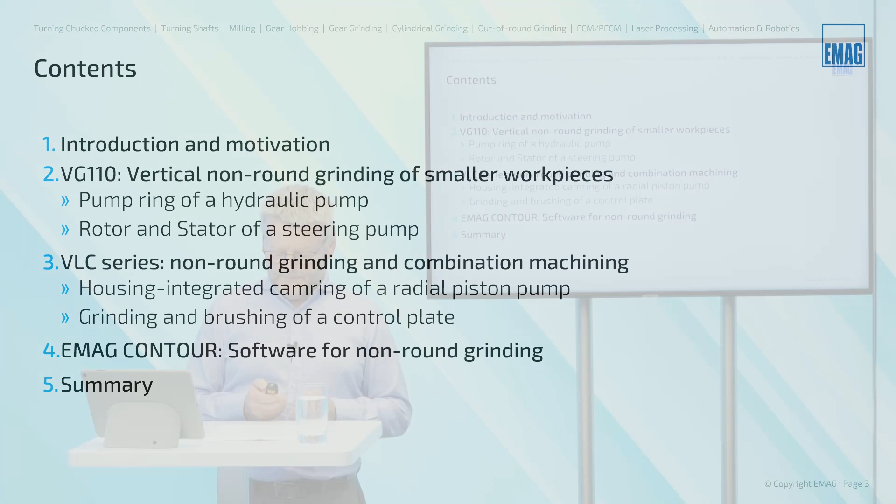Now, what was the motivation for this webinar? According to a study by Growth Market Reports, the global pump market is a growth market with an annual growth potential of around 4% until 2031.

Pump systems are not visible at first glance, but very important components in a variety of applications in our daily life. You can find pump systems in cars, in commercial vehicles, in vehicles for agriculture, in construction, and also in household applications or in heating systems.

The increasing demand for energy efficient pumps is likely to boost demand for pumps on the market. So the pump market is an interesting market area which differs from other market areas that currently have stagnation or decline in terms of growth.

That's the motivation for this webinar, and now I will hand over to Yannick for the first point, VG110. Please, Yannick. Thank you very much, Manfred.

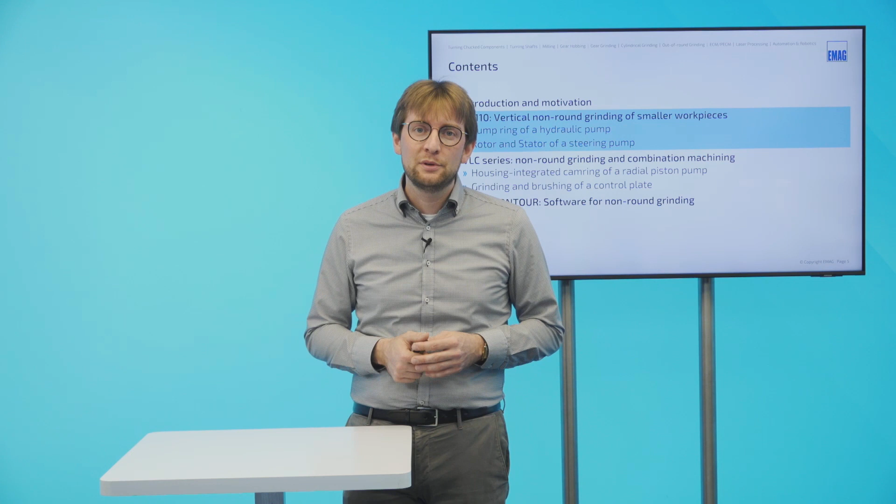Good morning, ladies and gentlemen. My name is Yannick Röttger. I'm responsible for the Department of Technology at Business Unit Grinding in Salach, and I'd like to introduce you in the next chapter to our machine solution VG110, a vertical grinding machine optimized for the production of small parts with non-round geometry. I'll present two use cases, two applications that have been carried out together with our customers.

The manufacturing of a pump ring of a hydraulic pump, and next a rotor and stator of a steering pump based on a gerotor pump system.

The VG110 workpiece portfolio includes workpieces up to a machining diameter of 110 millimeters. We can grind stators, rotors for gerotor pumps. We can grind pump rings for vane pumps, which we will focus on in the next minutes. We can also grind cam parts for camshafts, so a wide range of applications.

As you can see, especially in correlation to the size of the manual panel, it is a very compact machine with a small footprint, machine width with only 1.4 meters, so it requires very low space in your production shop floor.

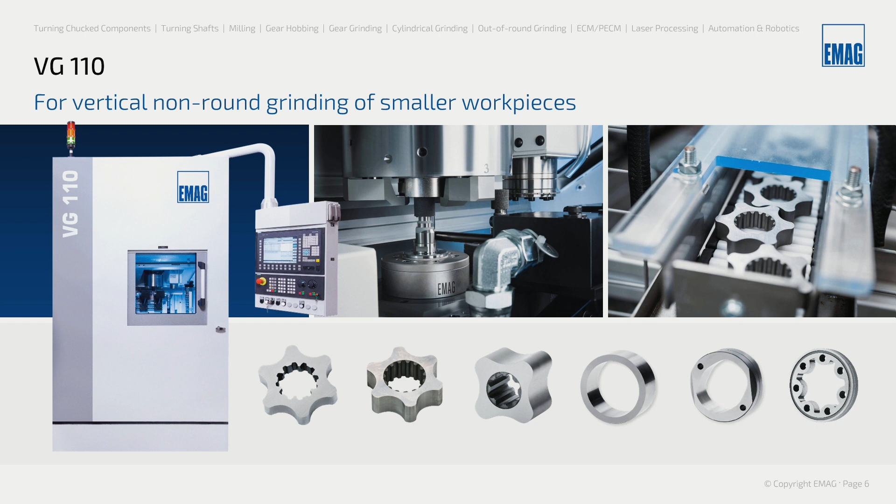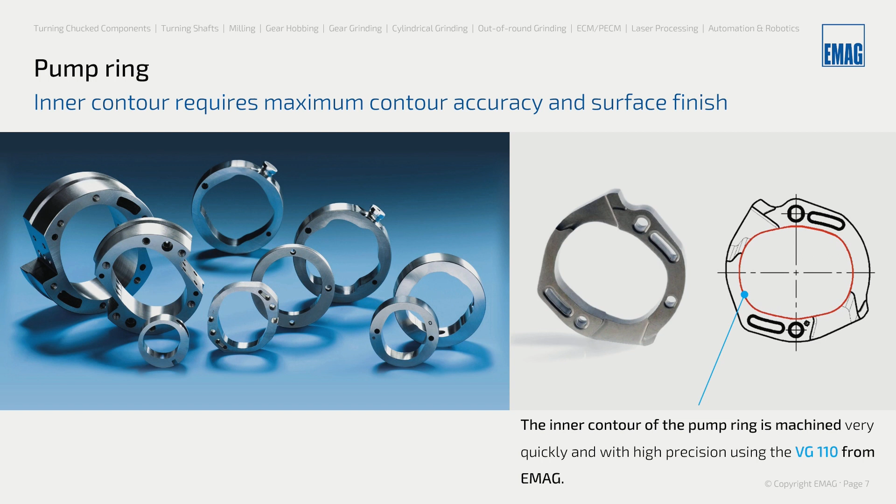The core component of a vane pump is the pump ring, which is shown here. We grind the internal diameter, marked red in this sketch. And the quality of the contour and also the surface finish has a significant influence on the energy efficiency.

And the noise emission of the pump in the further application in a vehicle or other machine types. So an optimized grinding process does not only save resources in your production, but also has a positive influence on the energy consumed in the further application. So we can optimize the holistic life cycle of this tool, of this part, and that's what makes the process design so interesting and challenging.

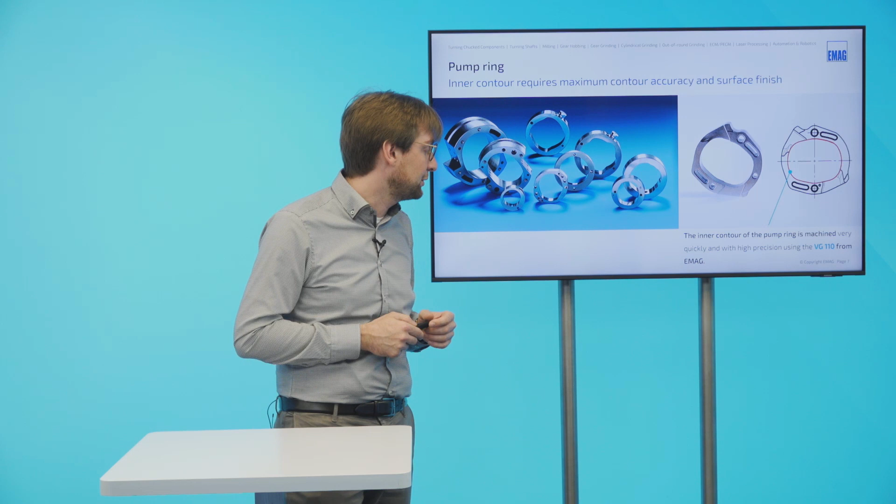What is the main functional principle of a vane pump? We have to understand this to make sure that we really achieve the required quality of the parts with regard to the further application. The red marked part in this sketch is the pump ring, which is ground with a non-round geometry in our grinding process.

The rotary rotor is the yellow part inside, and the vanes are fixed in these notches here, and with springs there is a force so that you have material contact between the vane and the pump ring. So you have fluid chambers with varying volume according to the ring geometry.

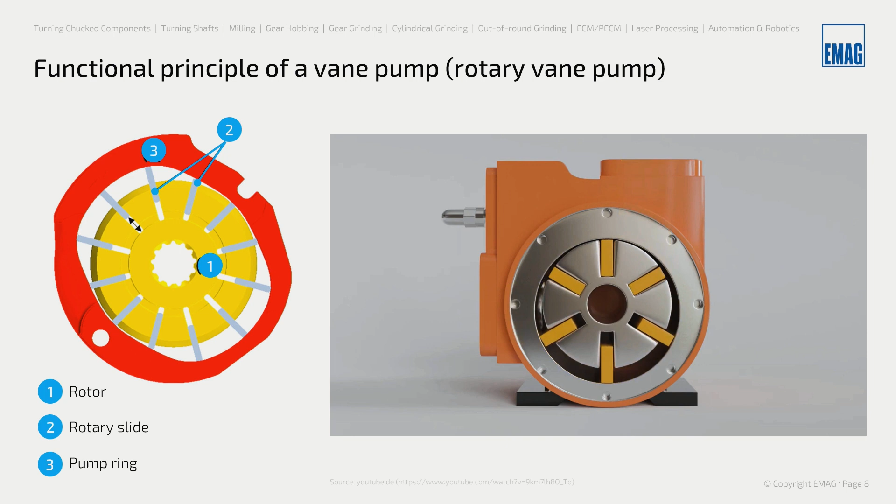In this video you can see on the inlet side we start with a small chamber volume that gets bigger, so there's an inlet of fluid, and the fluid chambers then get smaller, so we generate pressure, and that's what makes the pump work. Here you can see it in steel.

The pump ring is the part with the flat ground surfaces that we can see here, and the two holes for the inlet of the fluid in these sections. The rotor inside with the vanes is also visible here.

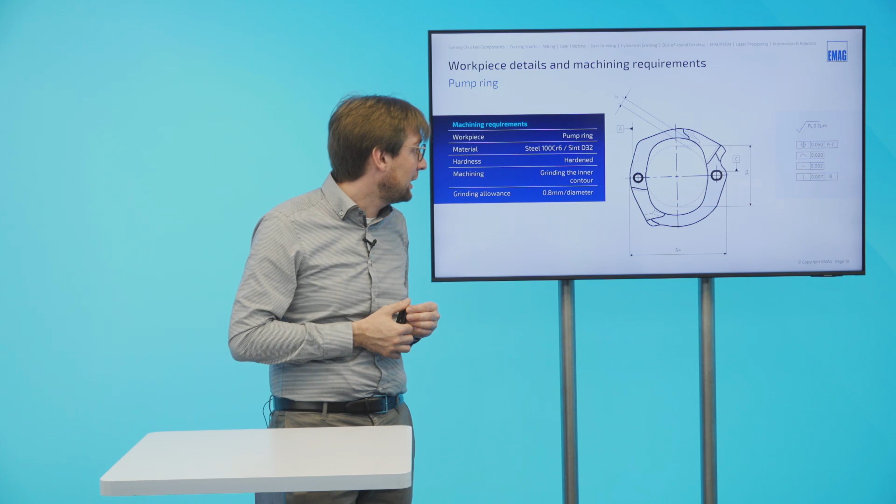What is our machining task for the internal grinding process of the pump ring? We have to machine hardened steel 100 chrome 6 or sintered metal D32. In both cases hardened, we have to grind the inner contour with a grinding allowance of 0.8 millimeter.

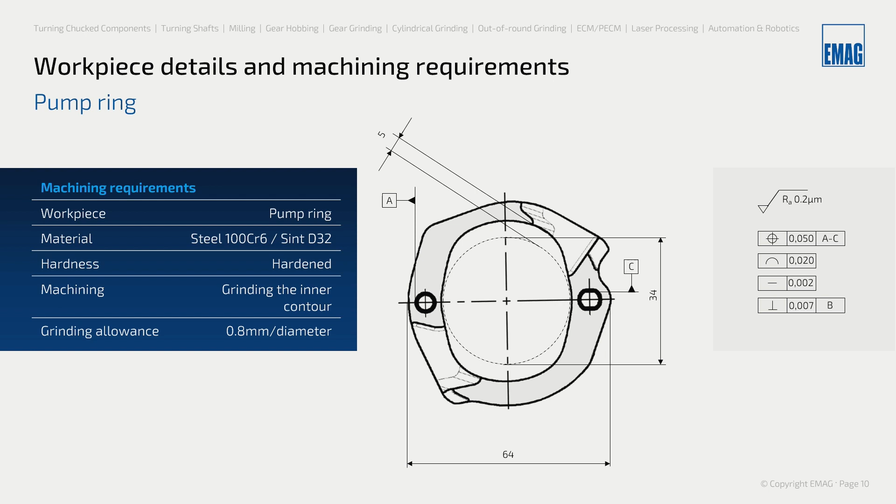So the main challenge in this task is to make sure that after such a high grinding allowance we get surface roughness lower than 0.2 microns. Of course, we have to pay attention to the shape of our part. The profile deviation has to be lower than 20 microns, the straightness deviation lower than 2 microns, and the perpendicularity lower than 7 microns. But focus here: achieving a surface roughness lower than 0.2.

This is our machine concept. You can see the design and the orientation of the axis. This concept is based on decades of experience at EMAG with vertical grinding machines and machines for combination technologies.

We have the machine base made of Mineralit. The customer or his automation places the raw part at our workpiece shuttle and also takes the finished part from the finished position next to the raw part position, both in horizontal directions.

The workpiece shuttle brings the part into the machine. It is lifted up by the workpiece lift, which is also responsible for the angular orientation of the parts, and brings it to the clamping device at the workpiece spindle. The workpiece spindle moves in X direction and brings the part into the machining area.

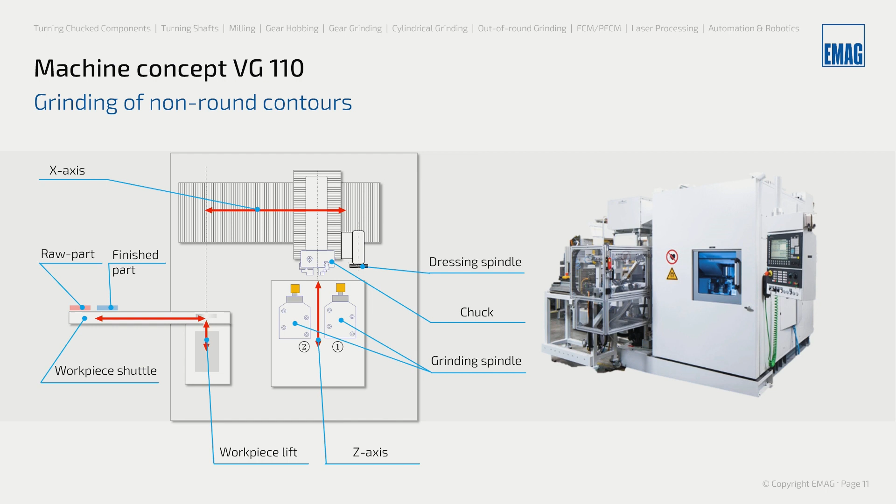As you can see, we have two internal grinding spindles available here. They move in Z-axis direction, so they make sure that there is contact between grinding tool and workpiece. In case that we use vitrified CBN grinding wheels, which are dressed in the machine, we use a dressing spindle that is mounted on the workpiece spindle.

On the right-hand side of the slide, you can see a system including also a workpiece handling system outside the machine, provided by EMAG.

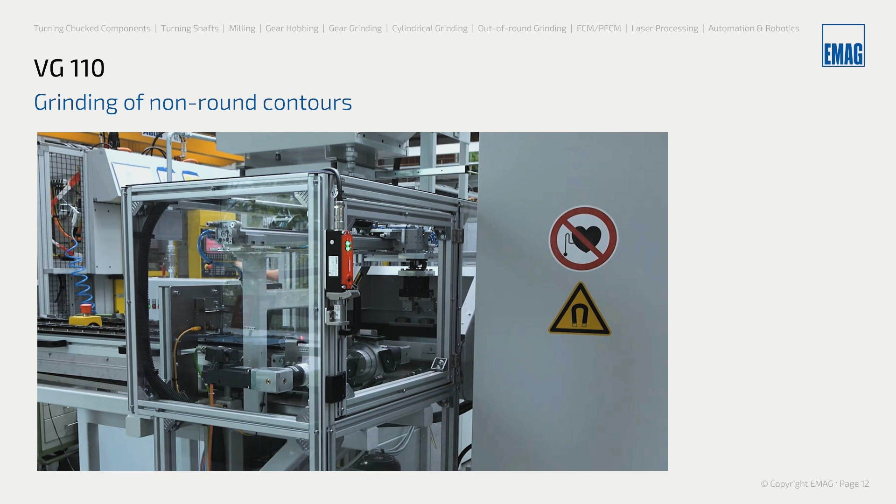How does it look in moving pictures? The workpiece handling here by our automation system brings the raw part to the shuttle, and here it takes the finished part from the shuttle. Here you see the placement on the shuttle, and here the finished part comes back for the further operation steps.

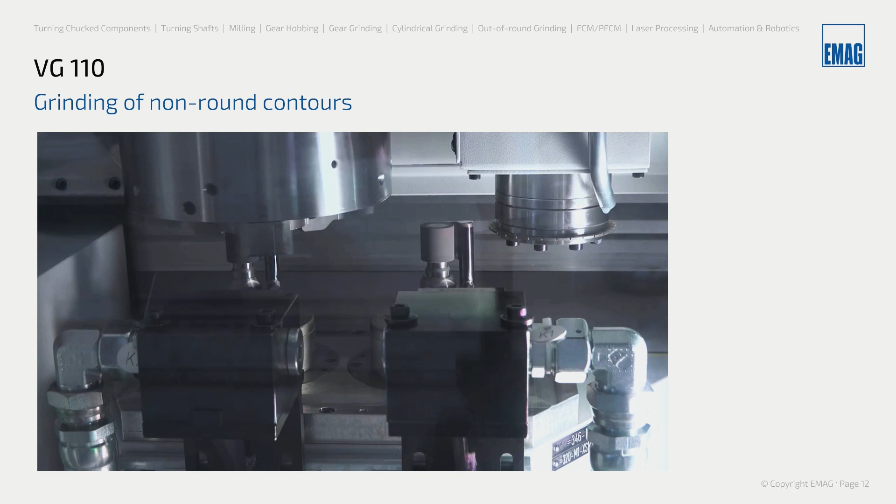Here the workpiece lift brings the part to the spindle, the grinding spindle moves in Z direction, and now the non-round grinding process can take place.

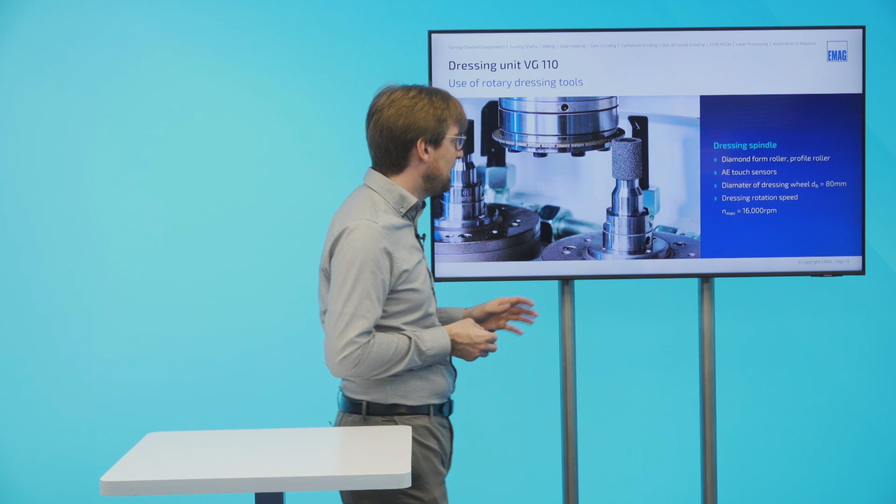As mentioned, we can use a rotary dressing spindle for the profiling and sharpening of our tools. We use it in combination with touch sensors based on acoustic emission signals. In this application, we use a dressing wheel diameter of 80 millimeters, and we can perform rotational speeds up to 16,000 revolutions per minute, so that we can set the process with the common ratios of dressing speed as required for vitrified grinding wheels.

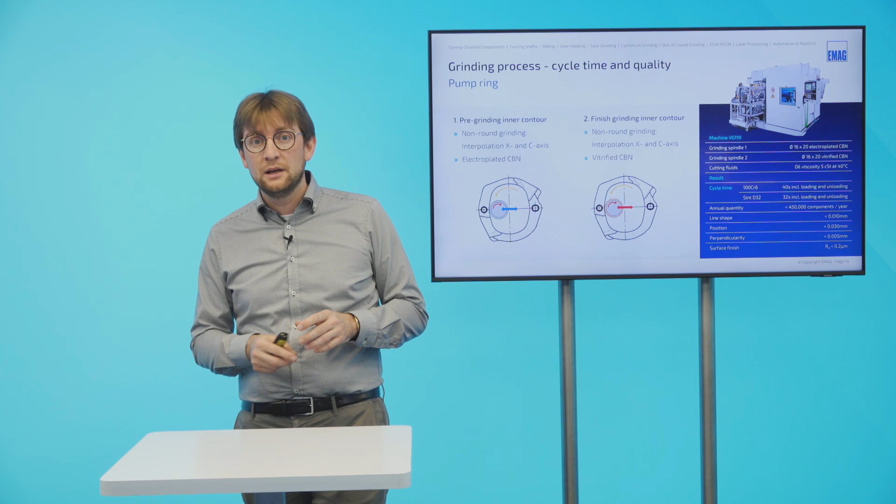As already clarified, one important challenge is grinding a high stock allowance while simultaneously achieving a low surface roughness. So we've chosen a two-step grinding process. The strategy is to first do a non-round grinding of the pre-contour with an electroplated CBN grinding wheel, which makes it possible to achieve high material removal rates, so we have low times for the first step.

For the finish grinding process, after we make sure that the geometry is okay, we use the finishing grinding process to make sure the surface roughness meets the requirements. For this we used a vitrified CBN grinding wheel, which is dressed in the machine. In both cases, the non-round geometry has been realized by an interpolation of the X-axis, the axis of the workpiece spindle, and the rotating of the workpiece in C direction.

For both processes, we used a grinding wheel diameter of 16 millimeters and a grinding wheel width of 20 millimeters. What is important to mention for internal grinding applications, we use an oil with a low viscosity, maximum 5 centistokes. Higher viscosity usually leads to an aquaplaning effect. We have a huge contact area between workpiece and grinding wheel, which can lead to high normal forces, causing form deviation of the geometry afterwards. So here a quite low viscosity is required.

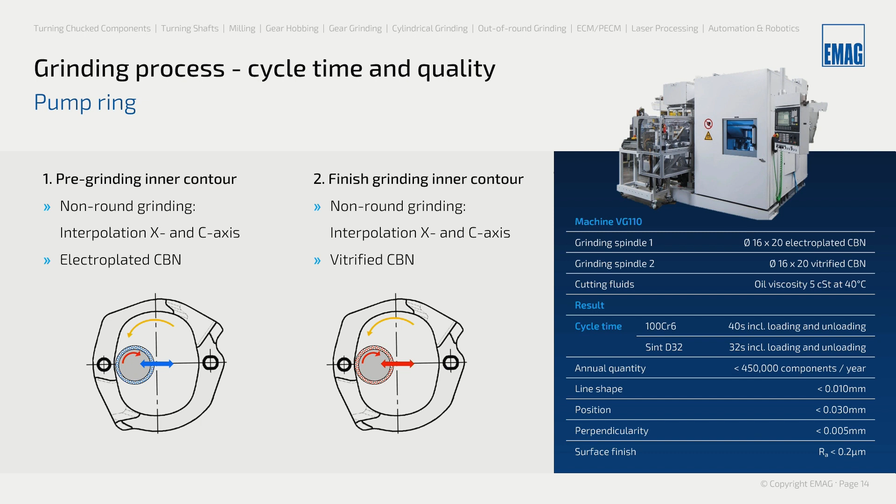What were the results of our grinding process? We achieved a cycle time, including loading and unloading, of 40 seconds for the part made of 100 chrome 6. Due to the better machining behavior of the sinter metal, we achieved a cycle time of 32 seconds. All in all, an annual quantity of 450,000 parts per year has been realized with the following geometry quality: straightness deviation lower than 10 microns, position deviation lower than 30 microns, perpendicularity better than 5 microns, and surface roughness lower than 0.2 microns.

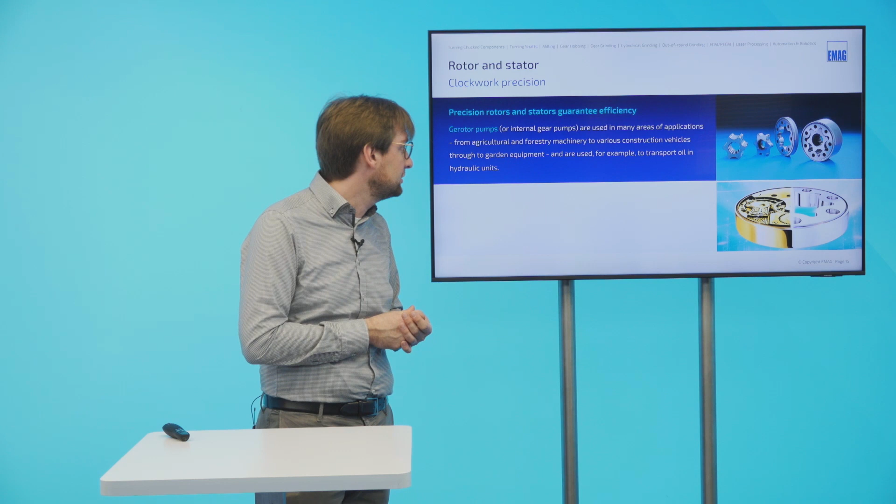The next example for precision pump components are rotor and stator of a Gerotor pump, also known as internal gear pump. They are used as hydraulic pumps in many different applications. This part was designed for a steering system of vehicles from agriculture, but they are also used with a very high quantity in construction vehicles, garden equipment, and many other applications that can be fulfilled by pump components like this.

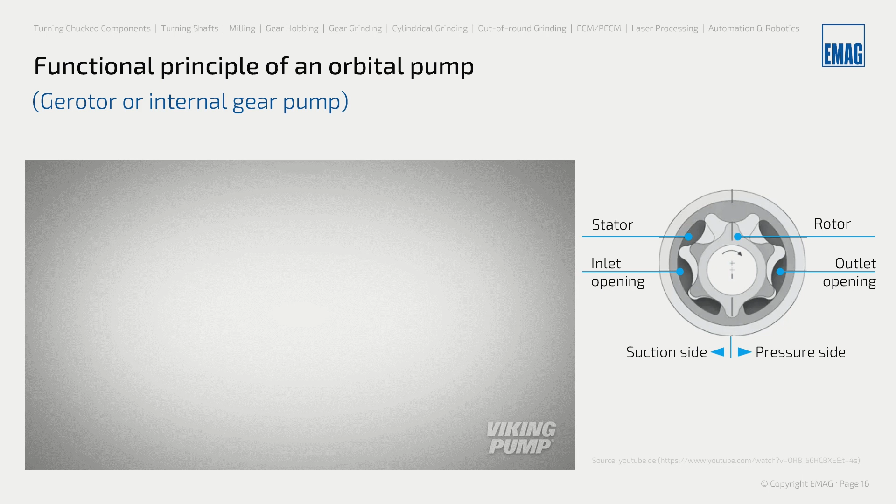First, we have a look at the functional principle of this pump. You can see the increase of the chamber volume on the inlet side is realized by the relative speed between rotor and stator and their specific geometry. The chamber volume gets bigger, so we have an inlet of fluid on the left-hand side, and then the chamber volume gets smaller, so there is a pump pressure generation on the right side.

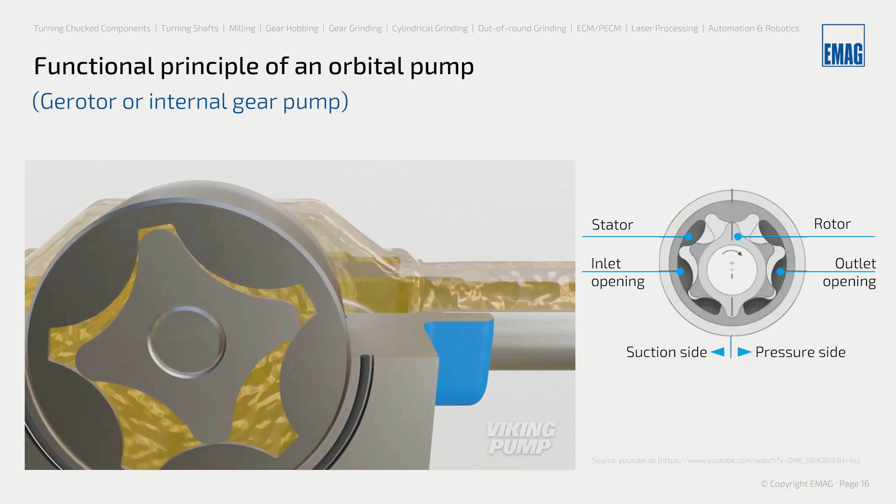This makes it quite easy to understand why the focus in this case is mainly on manufacturing the shape deviations. We have to achieve very small shape deviations because they influence the efficiency of the pump. We have no vanes which can help correct form deviations here, so the geometry really has to be perfect according to the requirements to have a high efficiency of this pump.

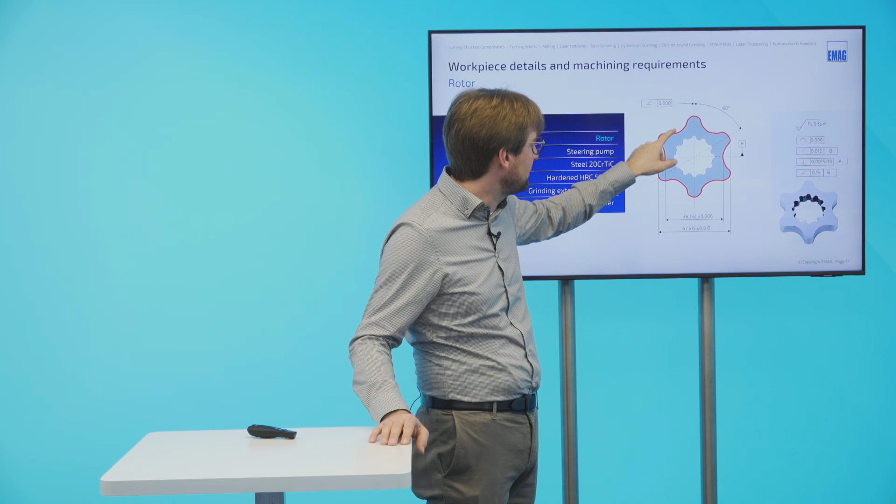For the rotor, we have to perform the outside grinding process for this part, outer grinding of the red marked area. The workpiece material was steel 20CrTiC, hardened up to a Rockwell hardness of 58 to 63. The external contour had a grinding allowance of 0.8 millimeter. The average surface roughness has to be lower than 0.5 microns, so a bit easier to machine than our last example.

But as already explained, the position and shape deviations are much more challenging. So profile deviation lower than 6 microns, parallelity lower than 12 microns, perpendicularity has to be lower than 15 microns, and we have a very small acceptable angular deviation for the angle between the peaks of the polygon, also maximum 6 micron tolerance for the diameter.

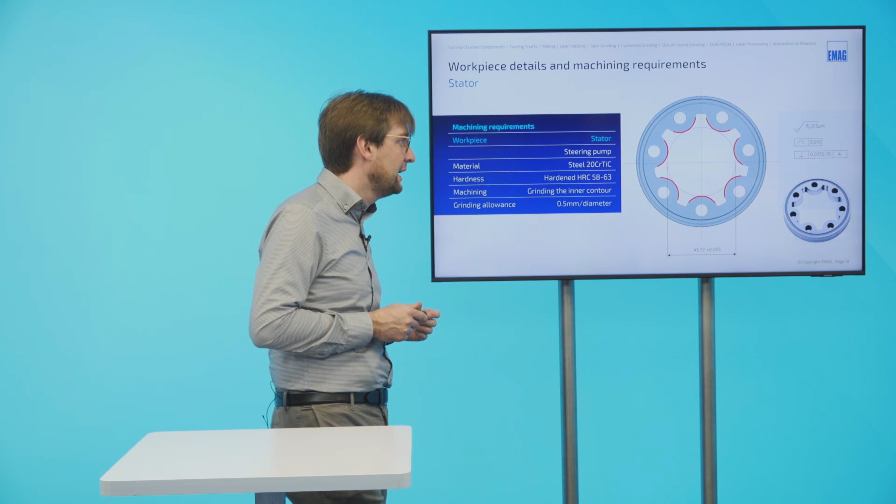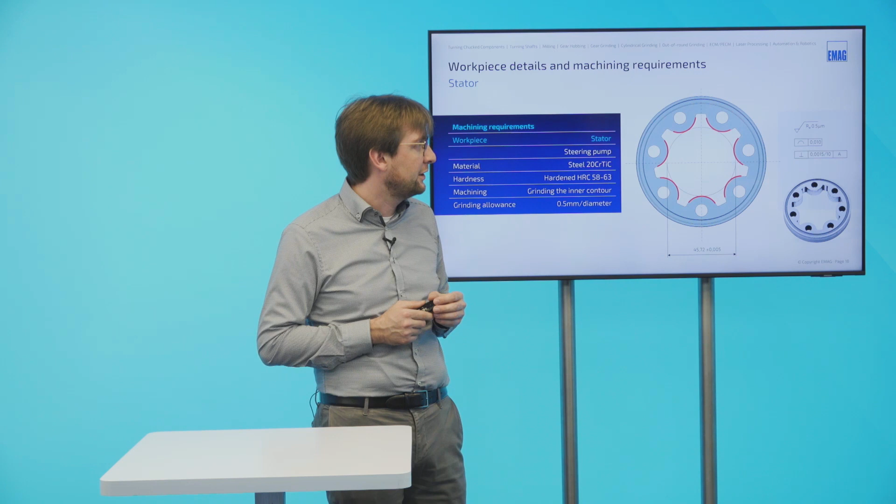For the rotor—for the stator—we have to do the internal grinding process, same material, same hardness, slightly lower grinding allowance of 0.5 millimeters. The finished part has to achieve a surface roughness lower than 0.5 microns, perpendicularity lower than 50 microns, and profile deviation lower than 10 microns.

What was the general grinding strategy for this application? First, we did a pre-grinding process, then intermediate measurement with a probe integrated in the machine, calculated the respective correction factors, and then did the finish grinding to achieve geometry and surface qualities. Same as in the last use case, this is non-round grinding by interpolation of X and C axes.

In both cases, we used vitrified CBN grinding wheels dressed in the machine. The angular orientation was done on the workpiece lift, and in both cases we had exact clamping according to the angular position of the internal gearing, or the inner contour for the stator.

Because of the geometry and especially the contact arc between grinding wheel and workpiece, we could use a grinding wheel with a diameter of maximum 16 millimeters for the rotor, but only 7.4 millimeters for the stator. We have less accessibility for the grinding wheel, as we would have contact to both surfaces, so the diameter is very limited. This leads to very difficult ratios of length and grinding wheel diameter, making it very difficult to find optimized process parameters.

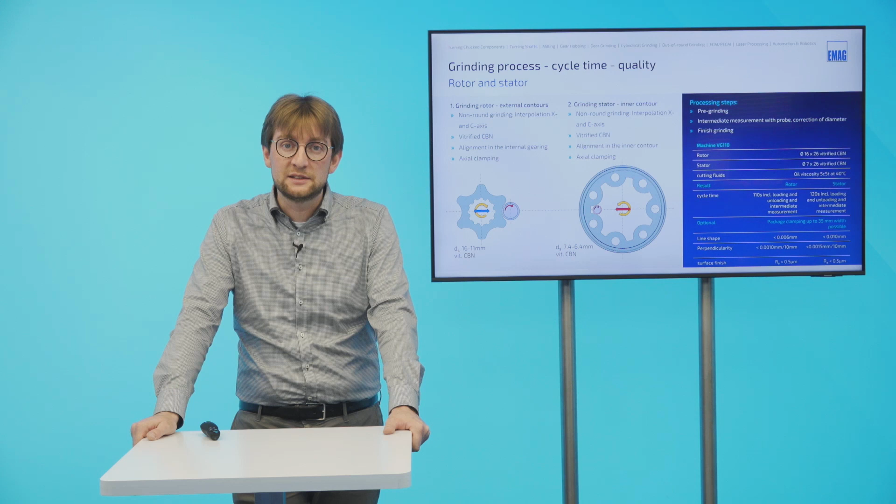Again, we use an oil with low viscosity, as already explained. The results in this example for our customer: we achieved a cycle time of 110 seconds for loading, unloading, intermediate measurement, and both grinding steps. The stator required a cycle time of 120 seconds.

In this example, we used a grinding wheel width of 26 millimeters, just a bit bigger than the width of the workpiece. For different workpiece geometries with smaller width, it's possible to clamp them as a package in the machine. We can handle a total grinding width of 70 millimeters, so for some applications even higher. This always depends on the geometry of the parts—if we can use bigger grinding wheels, we can increase the width of the grinding tool as well.

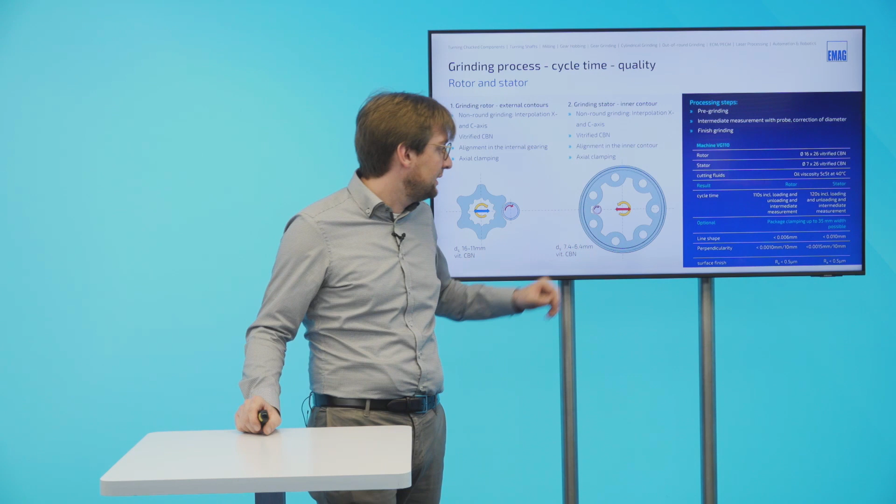Finally, we achieved straightness deviation lower than 6 microns for the rotor, lower than 10 microns for the stator. Perpendicularity was lower than 10 microns, respectively 15 microns, and in both cases the average surface roughness was lower than 0.5 microns.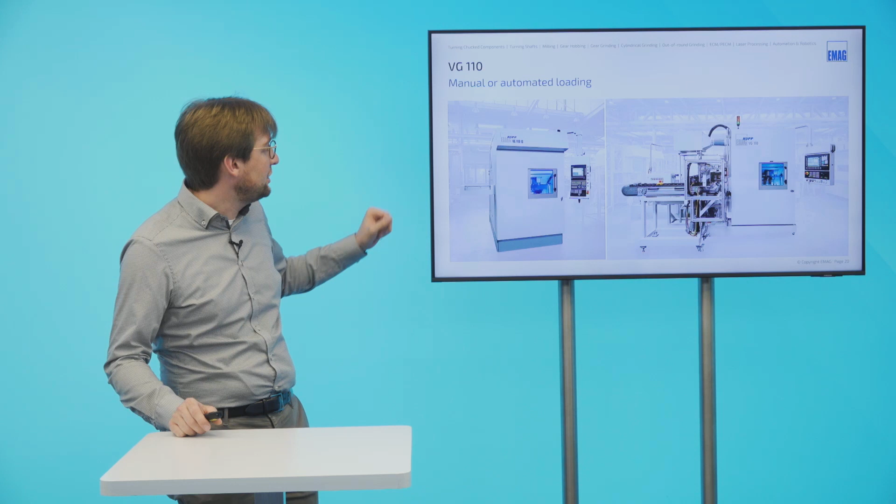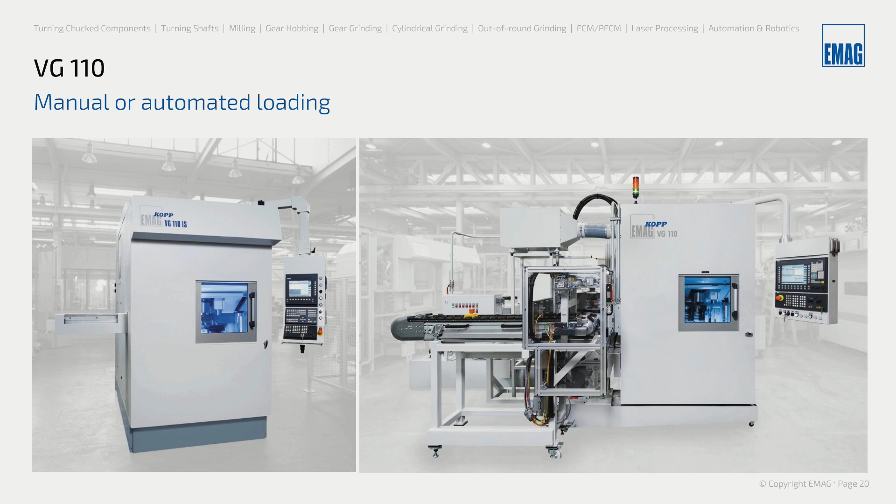You can order the machine for manual loading, or in case you want to link it to your own workpiece handling system, the shuttle is the connection to all the other steps. All the rest of the workpiece handling inside the machine—angular positioning, clamping, bringing it into the contact zone in the machining room—is done by the machine. And of course, we also provide workpiece handling systems for automation, constructed and produced by EMAG.

Finally, I'd like to summarize the main features of the VG110, optimized for small workpiece geometries up to 110 millimeters. We have high vibration damping thanks to the mineralite machine base. This enables us to achieve long tool lifetime and also high surface finish quality.

The chips can fall down into the dust collector. We reduce the interaction between abrasive parts in the grinding dust and the machine axis to a minimum. We have short chip-to-chip times because of the automation by means of the workpiece shuttle, the lift, and the pickup spindle. The machine is very small, so it requires very low space in your production.

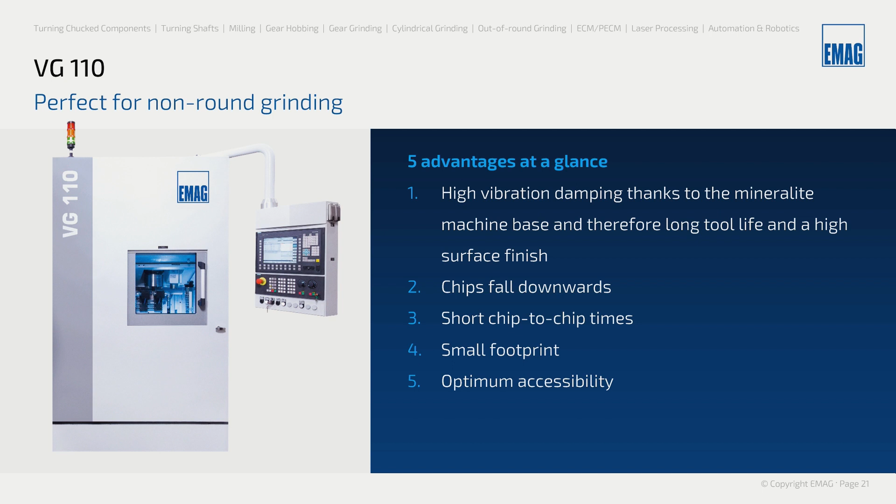You can place the machine in very small spaces, and we have very good accessibility. If you open the front door, you have good access to the clamping device and the two grinding spindles. You can observe the contact zone very well, which is very good for setting up the process for other workpiece geometries.

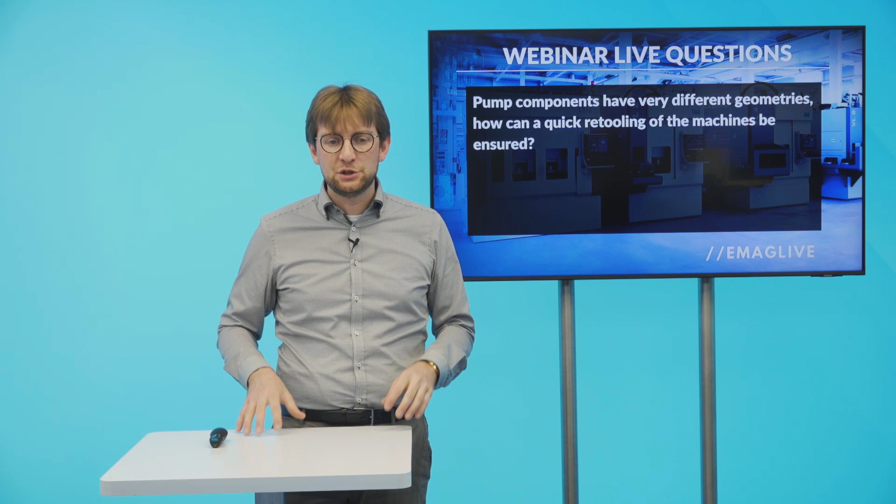Thanks. There's another question. Pump components have very different geometries—how can quick retooling of the machines be ensured? I think I already mentioned it: we have very good accessibility because of the big front door and the vertical spindle layout. Everything is just in front of the operator. It's easy to change the grinding tools and also to adjust the clamping device. I think one big advantage is that two grinding spindles are available. As shown in the last example, we can set one grinding spindle for the production of the rotor, one for the stator, and this makes it quite easy to fulfill the requirements for two different geometries. So I think this is also one advantage of this machining concept.

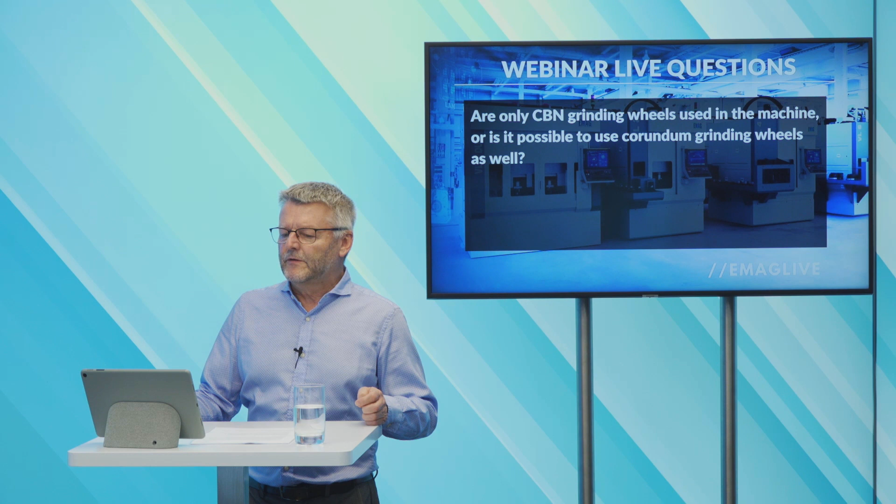Okay, there is one more question. Are only CBN grinding wheels used in the machine, or is it possible to use corundum grinding wheels as well?

In general, of course, you can also use corundum or other conventional grain material wheels in our machine. But as we have to deal with very small grinding wheel diameters, we have just a small number of grinding grains which have to do the machining work. So there's usually much more wear than with bigger grinding wheels, so it makes sense to use super abrasive grains.

And in case of machining steel, of course CBN makes sense. CBN has other advantages for internal grinding. In internal grinding, we have a high contact area between grinding tool and workpiece, so usually there's a lot of heat generation.

CBN grinding wheels, because of the splintering behavior, always have small sharp cutting edges, so this reduces the temperatures in the contact zone. Also, CBN has a much higher thermal conductivity, so heat can flow into the grinding grain, into the grinding tool. This also reduces the temperatures in the contact zone.

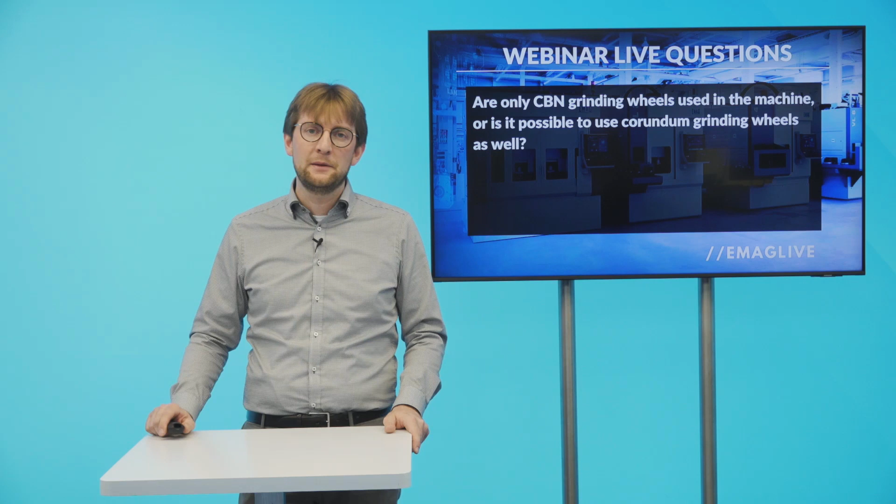One additional point, as we're talking about temperatures in the contact zone: it's very important to pay special attention to the coolant supply. Usually we use, in this case, CBN grinding wheels in combination with 3D printed cooling nozzles.

A question which comes up in each webinar: how long is the lifetime of the tools? How many pump rings can be machined?

Yeah, this is really the standard question in our webinars. Unfortunately, it's not possible for me to give a precise answer to this, but we have a lot of information in our data. We can do a good approximation of grinding wheel wear if we know the workpiece material, the workpiece geometry, and the required cycle times. So this is a question that can be discussed in more detail if you contact us or our colleagues.

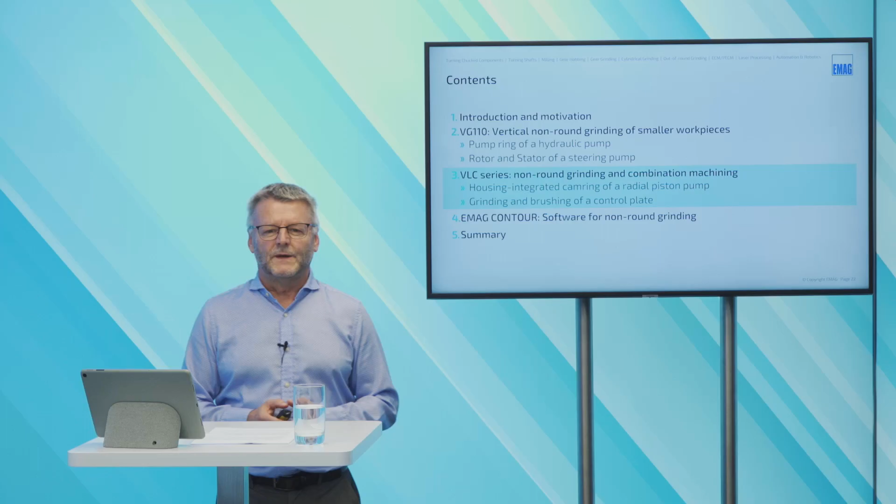Okay, so thanks for answering these questions. Now we come to the third chapter of our webinar, the VLC series.

We will show you two applications on these machines. You know, the VLC series are the machines which are very flexible, where you can use many technologies inside.

One application we will show you is a non-round grinding application for a housing integrated cam ring, which you can find in radial piston pumps. And the second application is a combination machining, grinding and brushing of a control plate, which you can find in the axial piston pump.

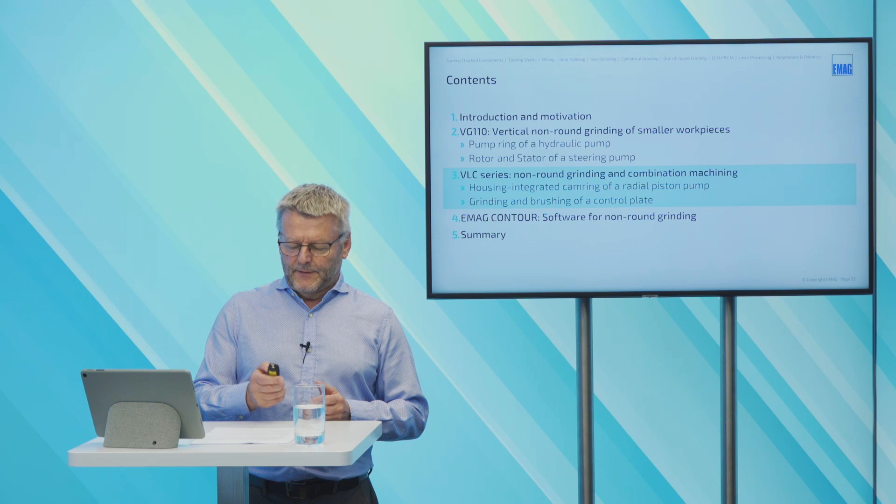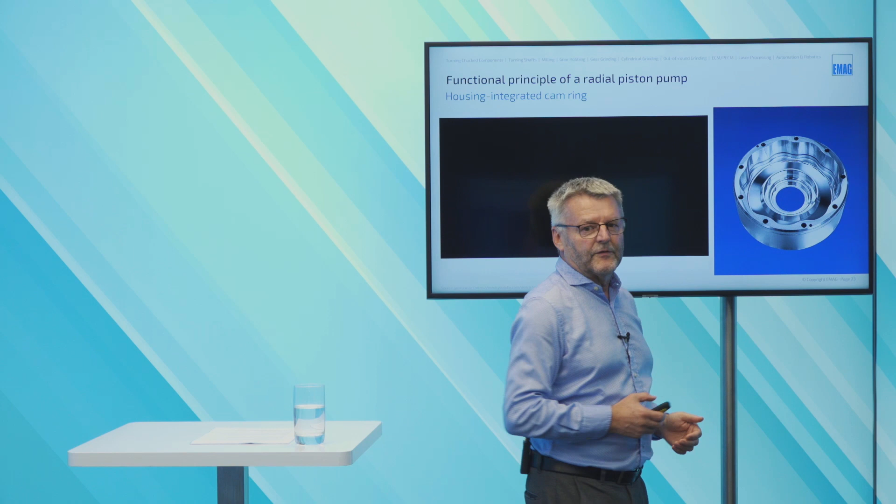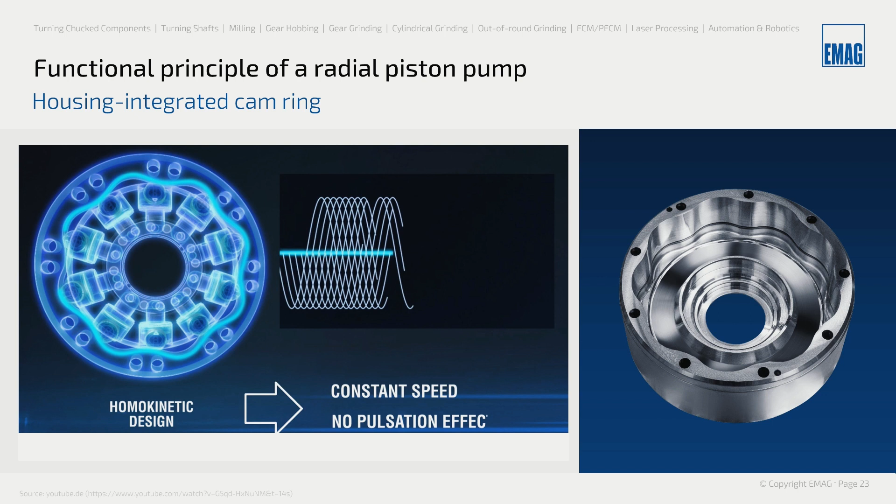Here we have a small animation. The contour of the cam ring determines the radial stroke movement of the pistons, which results in a constant volume flow on the pressure side without any pulsation effect.

So let's have a look at the workpiece details and the machining requirements. Here on the dimensions you see already, these are much bigger parts. The OD is 232 millimeters, the height is 108 millimeters, and the weight is 16 kilograms.

So that's a very heavy workpiece. The material is hardened 50CrMo4, hardened to 58 to 63 HRC, and the areas which we have to machine are marked red. You see here first the inner contour, then we have to grind the face, and we have to grind also the OD.

The grinding allowance in the inner contour is 0.8 millimeter in diameter. That's still a big stroke if you see the length of the cam contour. The requirements for quality: the surface quality is Ra 0.4, and the contour line quality is 50 microns. That's really a high requirement.

We have a straightness of 5 microns, and the perpendicularity between the inner contour and the face that we grind is 20 microns.

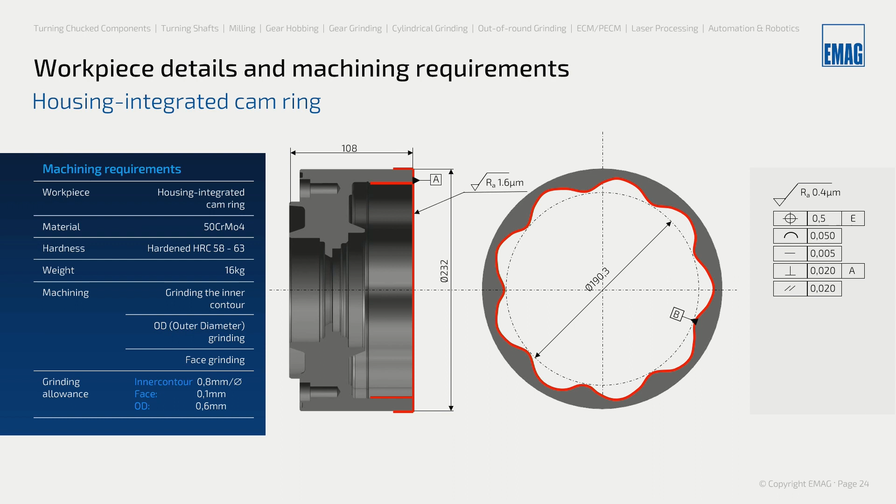So on which machine concept did we realize this? This is our VLC 350 GT, our standard combination machine, which is very flexible. On the right side, you can see a standard picture, the machine equipped with a turret for turning tools, an ID spindle and an OD spindle.

But for this application, we modified the machining area inside with 3 grinding spindles. The machine bed here is also made of MINERALIT, like we heard before on the VG110. The big advantage here is inside on this machine bed, you can put many different technology units to find the best combination.

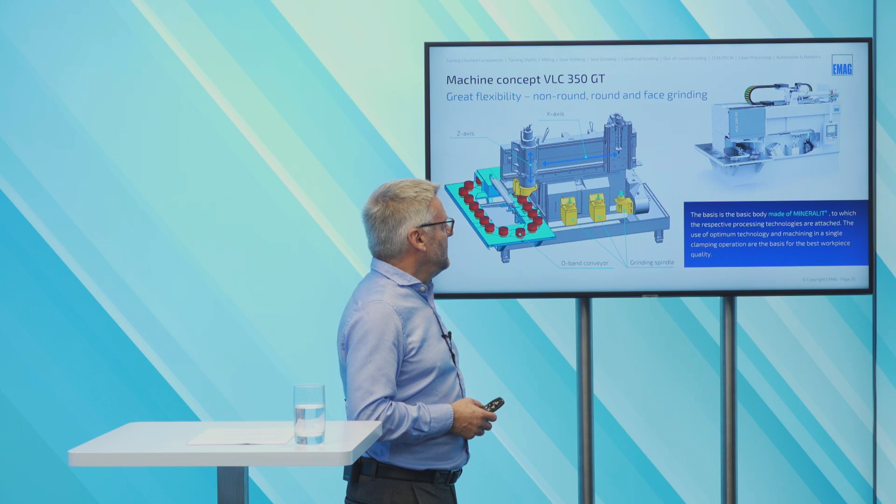And you can set up the workpiece in one clamping and get highest quality. Here you see the machine, the x-axis on the top. The x-axis brings the workhead from the loading area into the machine and back for unloading. We have the vertical z-axis to pick up the workpieces, and inside the working area we have 3 grinding spindles. Here we have really 3 different grinding processes: non-round grinding, round grinding and face grinding in one machine. Let's have a look at the grinding process, the grinding chain.

The first is the grinding of the inner contour. It's a non-round grinding process, the interpolation between the x-axis and the c-axis, and we use vitrified CBN wheels. The second step is the grinding of the face. Here also we use vitrified CBN grinding wheels, but with a special specification so this wheel can be self-sharpened. This means there is no dressing necessary for this CBN grinding wheel.

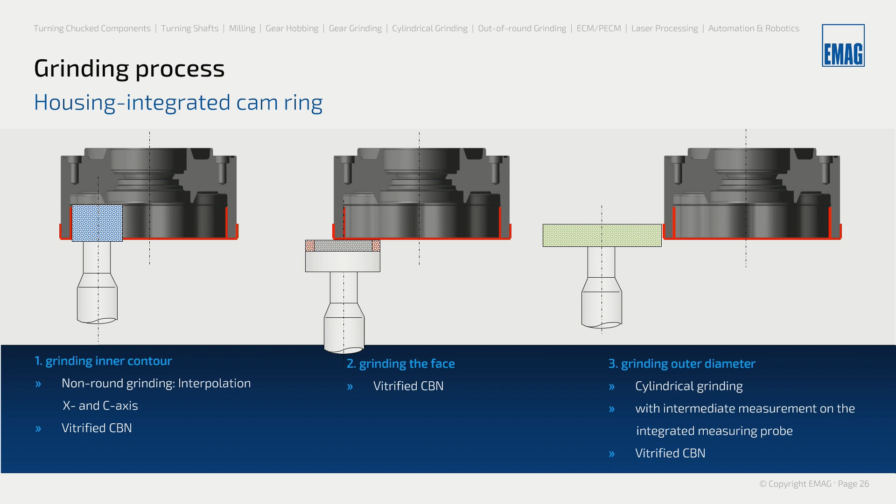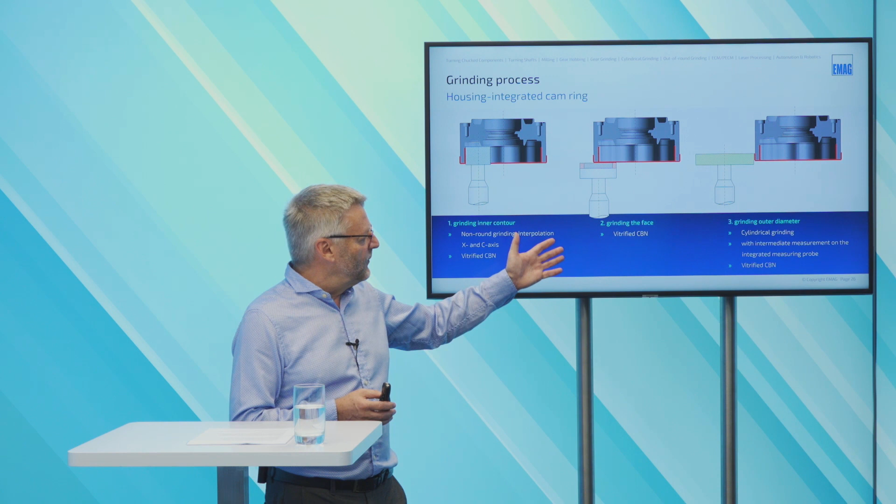And the third grinding operation is the grinding of the OD. It's a cylindrical grinding process, and we did this in a pre-grinding, intermediate measurement, and finish grinding, because the request was to reach a tolerance less than 10 microns in the diameter. Also here we used vitrified CBN grinding wheels.

And it's interesting here, before we saw on the VG110 the wheel diameters are approximately 16 or 20 millimeters. Here we can use a bigger wheel for the contour grinding because we have a bigger cam contour. It was here diameter 40 millimeters, but this grinding wheel is always calculated to the minimum radius of the cam contour. We reached the requested qualities.

The line shape smaller than 50 microns, the straightness smaller than 5 microns, perpendicularity smaller than 20 microns, and the surface finish quality of RA 0.34.

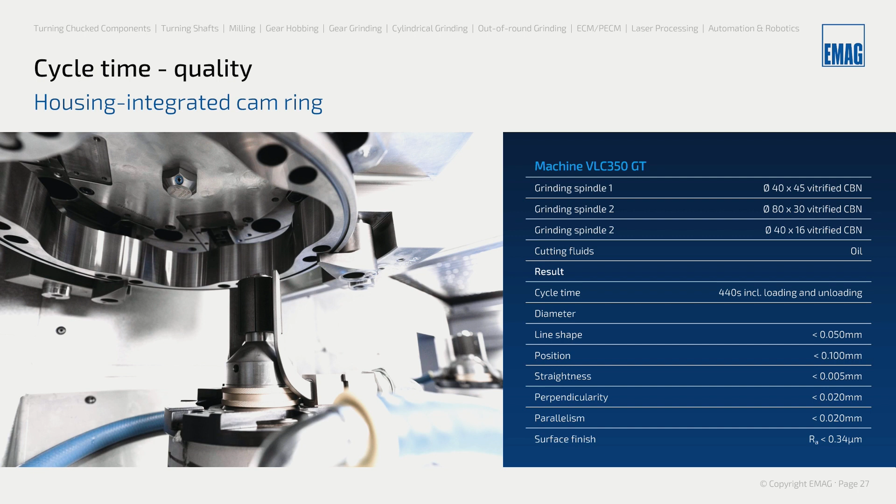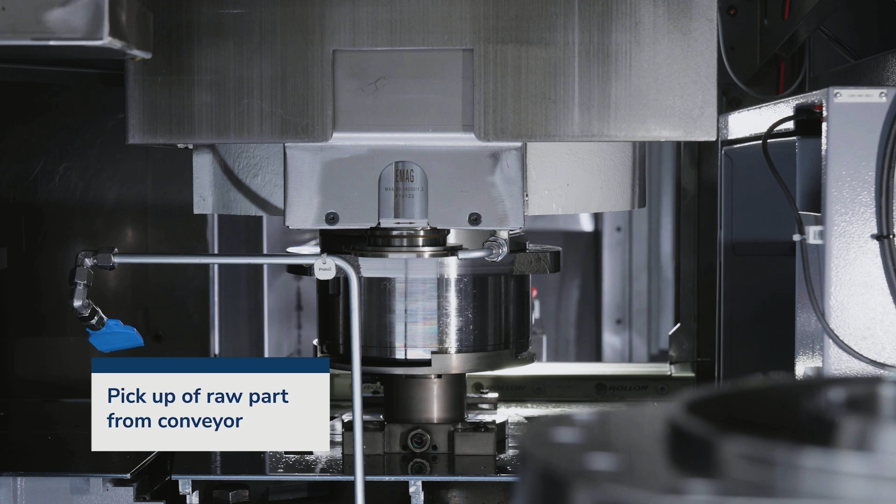So now we see a small video of this application. Here the machine, the VLC 350 GT, the front view. This machine is equipped with a conveyor type with pallets for raw and finished parts. We pick up the raw part with a clamping arbor in the bore.

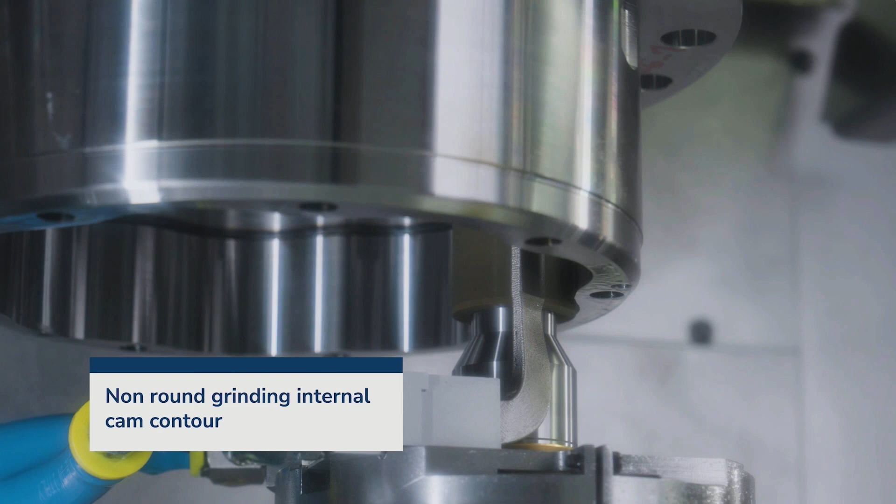Then here we have to do a pre-radial measuring in the reference hole because the inner contour must have a relation to this reference hole. Now we see in the first step grinding of the inner contour, the interpolation between X and Z axis.

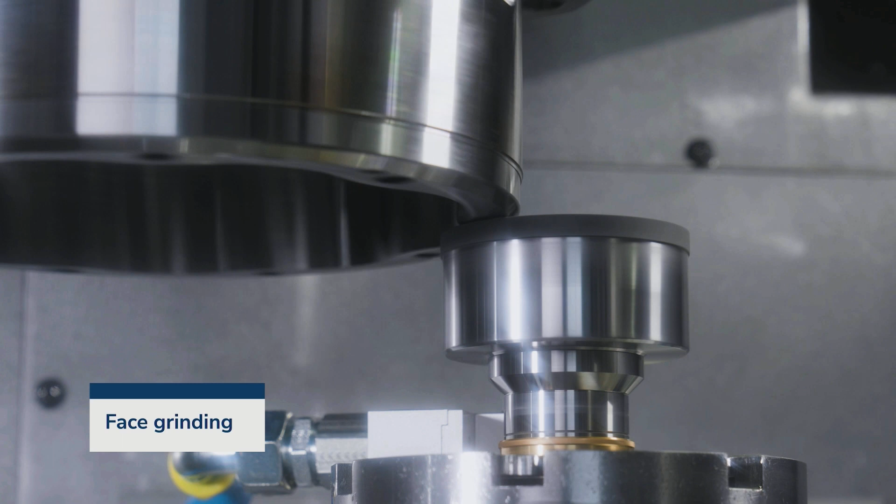Then we have in the second step the face grinding. As I mentioned before, here we use a special CBN specification, a self-sharpening specification. This wheel must not be dressed.

And the third operation here is a pre-grinding of the OD. Then we have the measuring of this OD, so we know the exact stock we have, and the last grinding process is the finish grinding of the OD.

After the grinding process, the part is unloaded on the pallet of the conveyor system again.

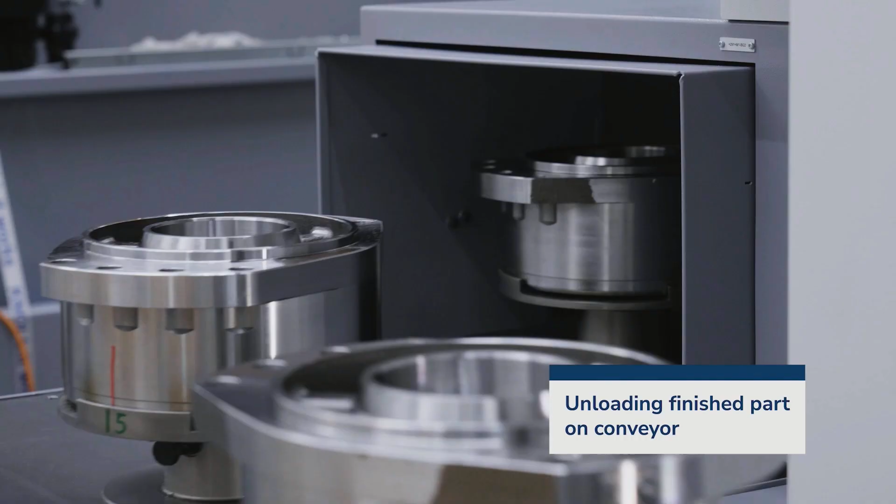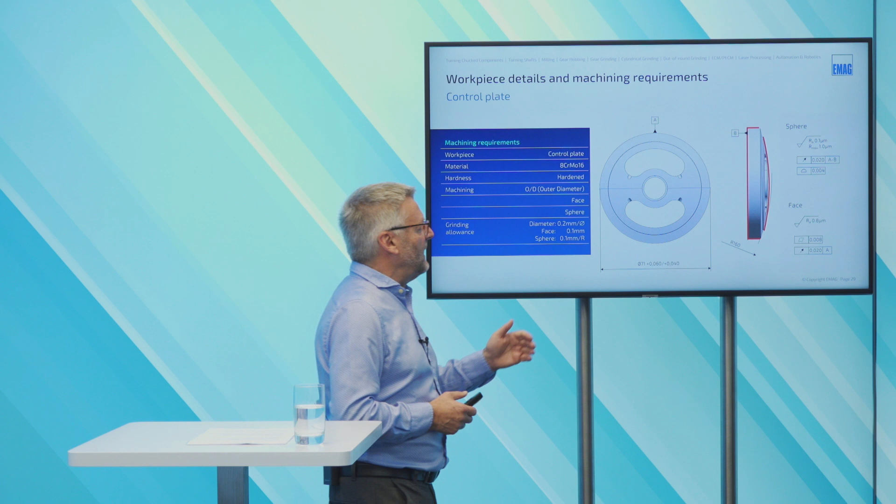Good. The second application I want to show you is a control plate, which you can find in axial piston pumps. The material of this control plate is a hardened 8CrMo16, and what we have to grind is marked again in red color here. We have to grind the face, we have to grind the OD, and we have to grind the sphere, as you see here, on both sides.

Therefore, it's necessary to make the grinding in two steps. In a first step, we have to put the part out of the machine, turn it 180 degrees and bring it inside again for the second step. The grinding allowance on the diameter is 0.2 on diameter, the face 0.1, and on the sphere we have 0.1 in radius.

Special here, I want to show you the requested quality. The surface quality of the sphere is Ra 0.1, that's a hard request, and also the area form error of 4 microns and the runout of 20 microns relative to the basic A and B, which is the face and the OD.

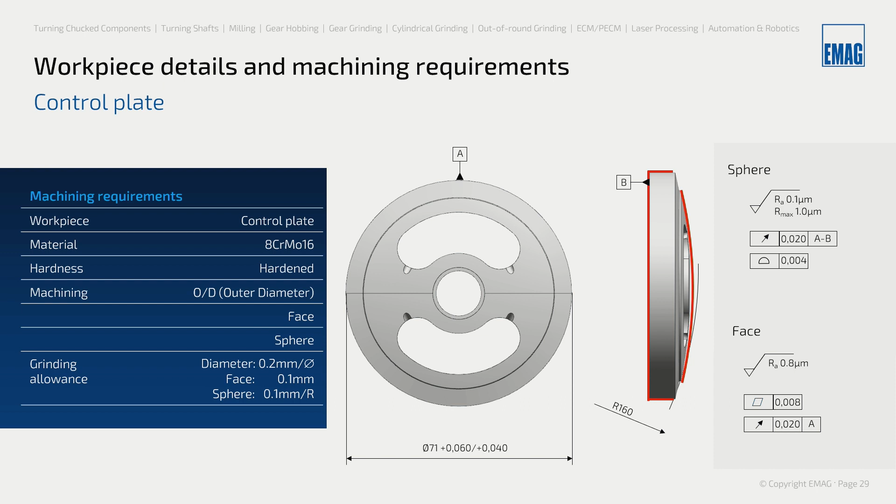So the machine concept, basically, it's also a VLC machine, but it's a smaller size. It's a VLC 200 GT, a smaller system of the VLC 350 GT that we saw before.

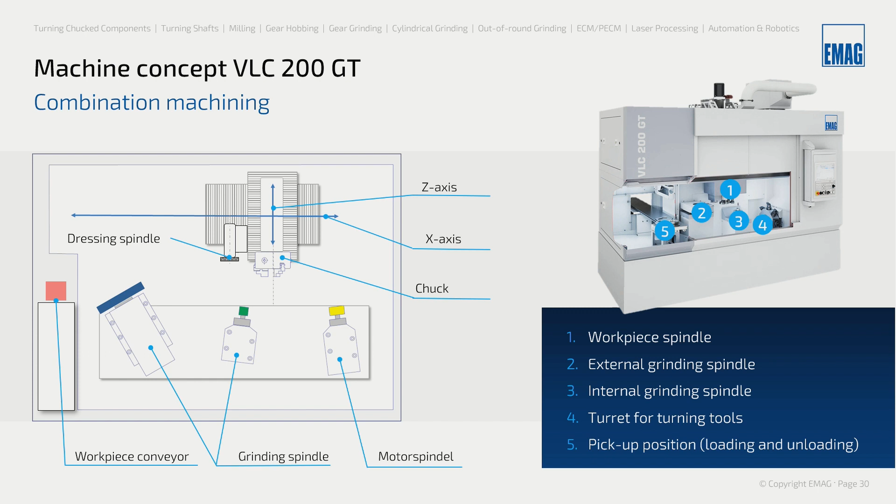On the upper side, we see again the X and Z axis, and the workhead with the clamping system and the dressing spindle. On the machine bed, three spindles are assembled. On the left side, the inclined grinding spindle for OD grinding. In the middle, an inclined grinding spindle for grinding the sphere. And on the right side, a motor spindle equipped with a brush.

Now we can see the details of the process chain. First, we start grinding the face with a corundum wheel, diameter 400 millimeter. For grinding the OD, we use the same grinding wheel. Afterward, we do the brushing process with a plastic brush with abrasive grit. We have to brush because the drawing requires no small burrs on the edges of the workpiece.

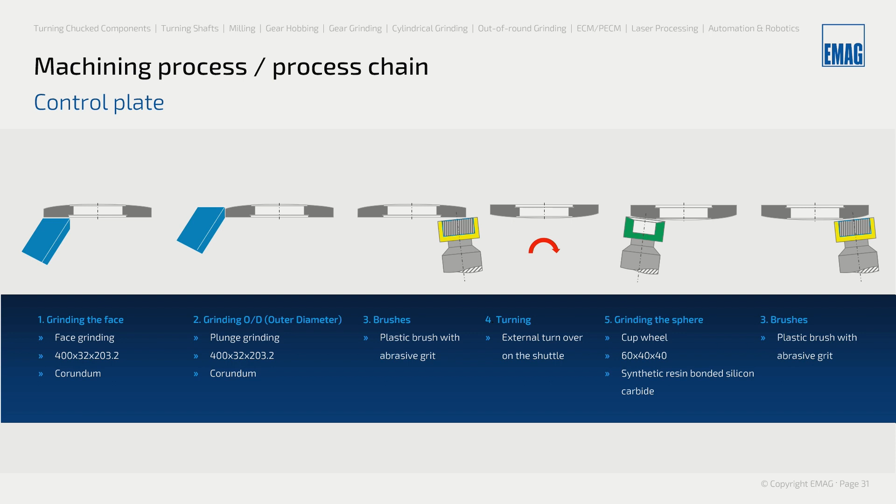Then we move the part out with the workhead onto the shuttle, turn it with an external turnover unit 180 degrees, clamp it again in the bore and bring it in to grind the sphere. This grinding process uses a cup wheel with diameter 60, specified as a resin bonded silicon carbide wheel. The last step is brushing the opposite side with the plastic brush.

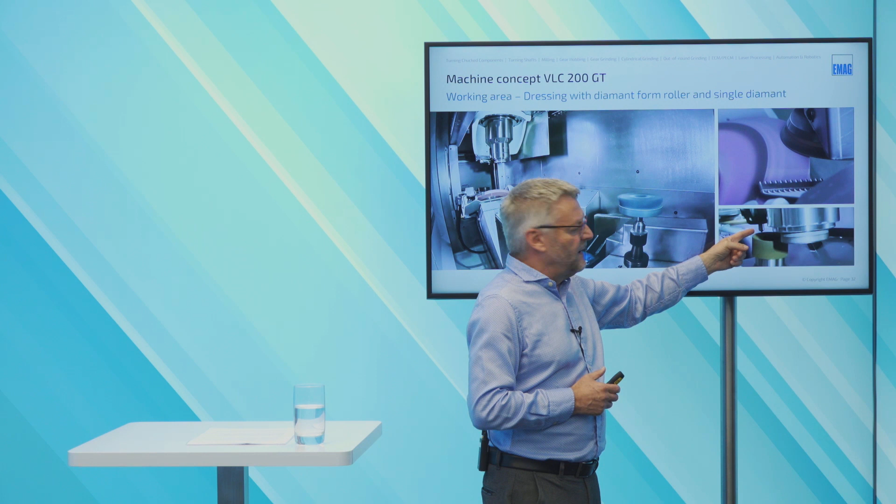For this application we use two different dressing units. For dressing the OD grinding spindle, we use a rotating diamond form roller to dress the face and OD of the wheel. For the cup wheel, we use a fixed single diamond dressing tool to dress inside the cup form, because inside we cannot use the big diameter rotating wheel—that's not possible to fit in, so we use the fixed single diamond dressing tool.

Which cycle time and quality did we reach? The cycle time was 3.82 minutes, including loading and unloading. We use emulsion for the grinding process. Let's look at the qualities reached on the sphere: the shape form was smaller than 4 micron, the runout smaller than 5 micron, and the face quality smaller than RA 0.1.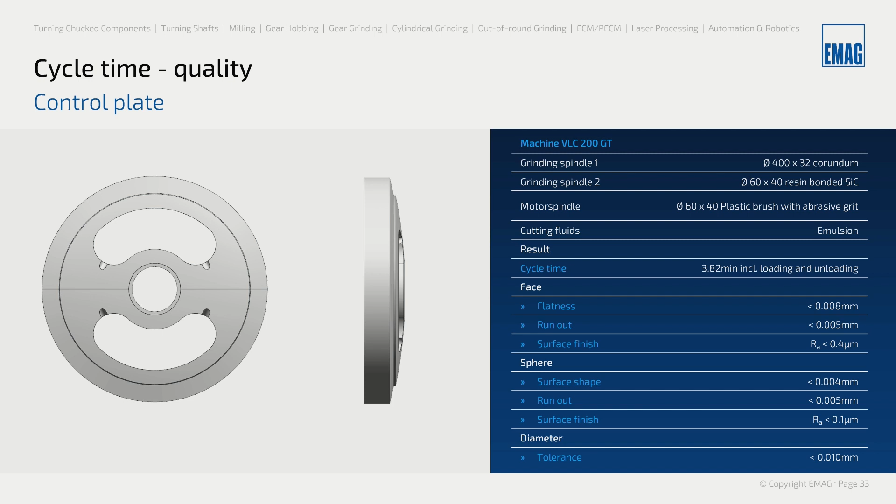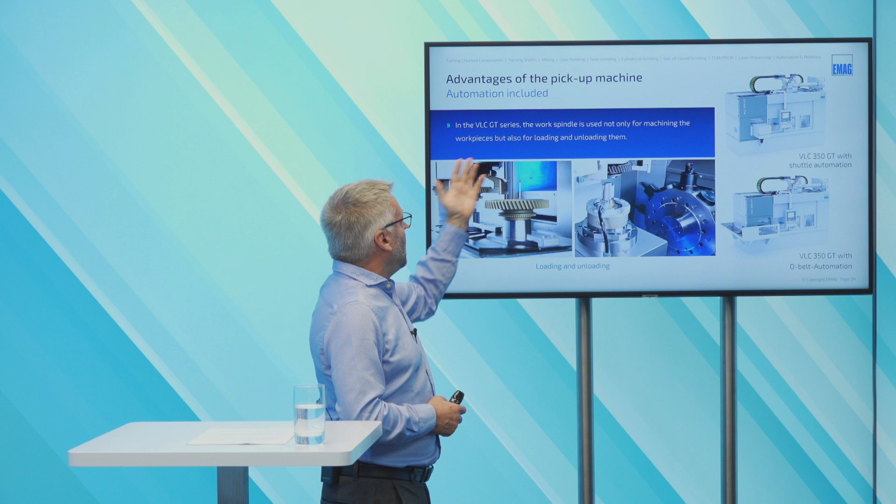Interesting application. Now I want to give you more information about this VLC series. With this pickup machine, you get the automation included, because the workhead moves the part from the loading position into the machine, then machining happens, and it brings the part back for unloading. So this automation cycle is already included in the machine.

We can offer basically two options for the automation. On the right side at the top, you see the machine with shuttle automation, which moves forward and backward in the loading/unloading area. Outside the machine, such a shuttle is normally loaded and unloaded via automatic cell. On the bottom, you see the VLC machine with D-belt automation, running around, and on this conveyor you can have up to 20 pallets for the parts. Most of the time this conveyor is loaded and unloaded manually by the operator.

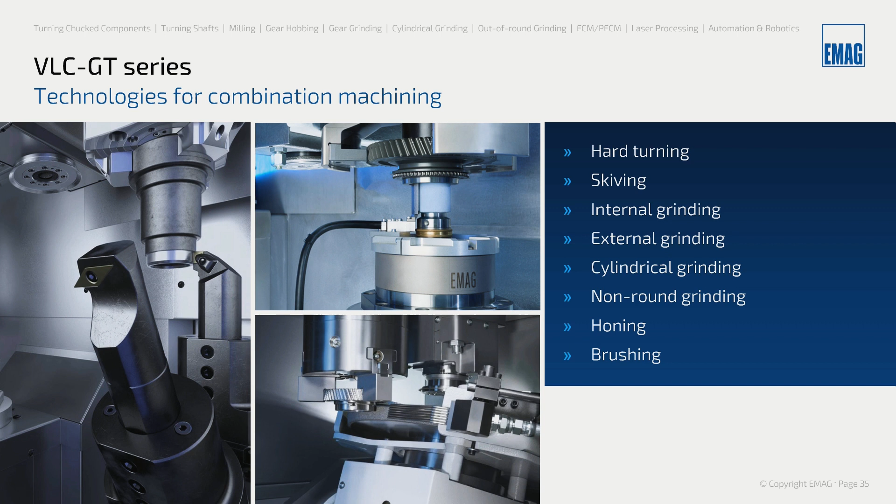Here are some examples of technologies that can be used in this combination machine to reach the best quality: hard turning, skiving, internal grinding, external grinding, cylindrical grinding, non-round grinding, honing, or also brushing is possible in the machine.

So here I want to make a summary of the advantages of this machine type. It's possible to make a complete machining in a single setup, which brings maximum workpiece accuracy, as it's possible to combine different technologies in the machine, like turning and grinding. You can use round or non-round grinding, milling, reaming or honing—this is a very big advantage for this machine type. You also have the integrated automation as shown.

We have short distances, so the chip-to-chip time is very short. Here we have the typical EMAG vertical machining. It's the best way for the chips to fall downwards.

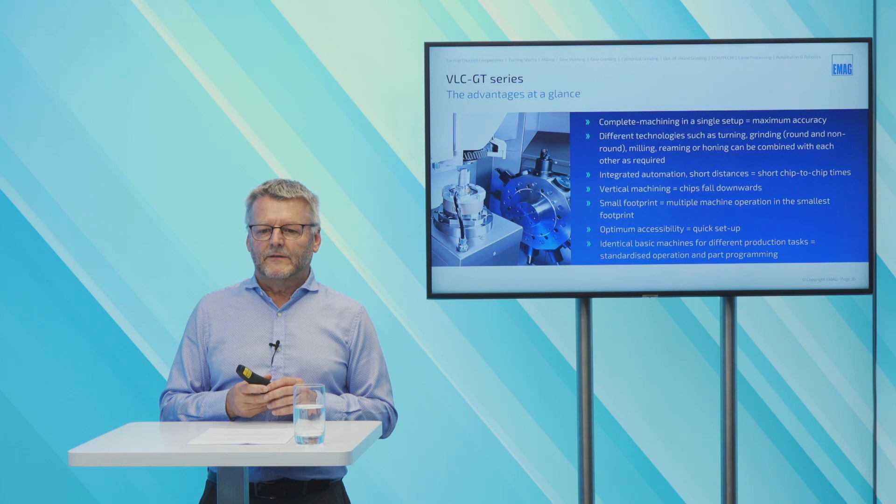So that's the end of chapter 3.

Before we proceed, we will try to get in discussion with our audience. We have some questions in the chat. First question, a very good remark, because we already discussed it in the German version of the webinar: why is the diameter of the outer grinding wheel so small?

Basically, this cam ring in the housing has two different types for the customer. One type is for the inner contour with a surface quality of RA 0.4, and one of RA 0.2. If the request is for RA 0.2, as we saw already in your presentation on the VG 110, it's a two-step grinding process. This cannot be done with a stock of 0.8 millimeter in the diameter using only one wheel. One wheel is selected to grind the material away, and the second wheel is selected to make the cam contour and the surface quality. That's the reason we have two small wheels inside. If the surface quality requested is RA 0.4, we use this second small wheel for the OD grinding operation.

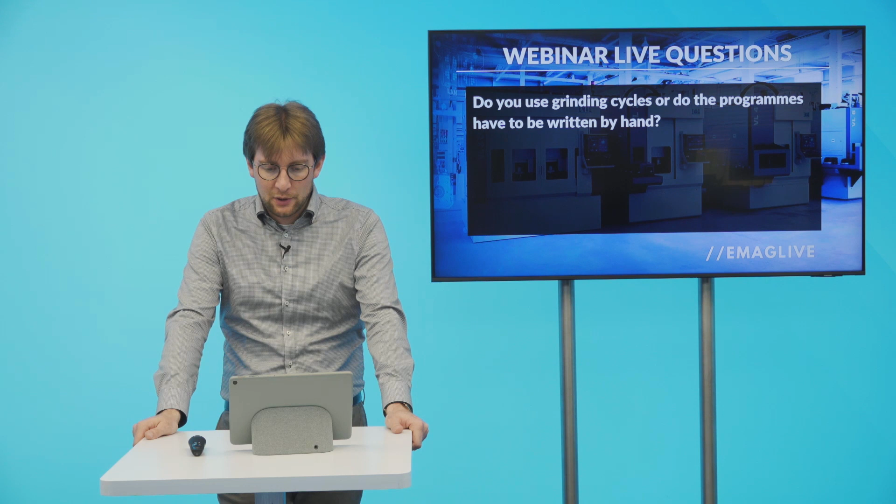Okay, there are some more questions. Do you use grinding cycles or do the programs have to be written by hand? Yes, sure, we have fixed standard grinding cycles and dressing cycles—grinding cycles like incline grinding of faces, OD grinding, or dressing cycles also for dressing the face and the OD. These are standard cycles. Sure, to make the complete NC program, you have to put these grinding cycles together with the geometry data, the dimensions of the machine, and the detailed grinding process data like cutting speed, infeed, and other things.

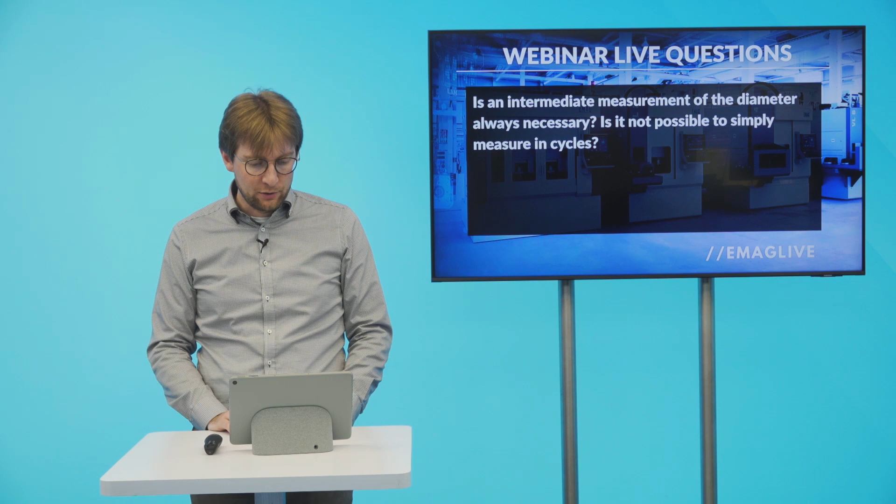Next question deals with our measurement system. Is an intermediate measurement of the diameter always necessary? Is it not possible to simply measure in cycles? So the question is whether it's necessary to always measure for each part. That's right—only for this application, to reach a quality of 10 microns in the diameter, we measure each part. For other things, we have a standard cycle to measure each 10 or 50 parts. It's not necessary to measure each part. That's right.

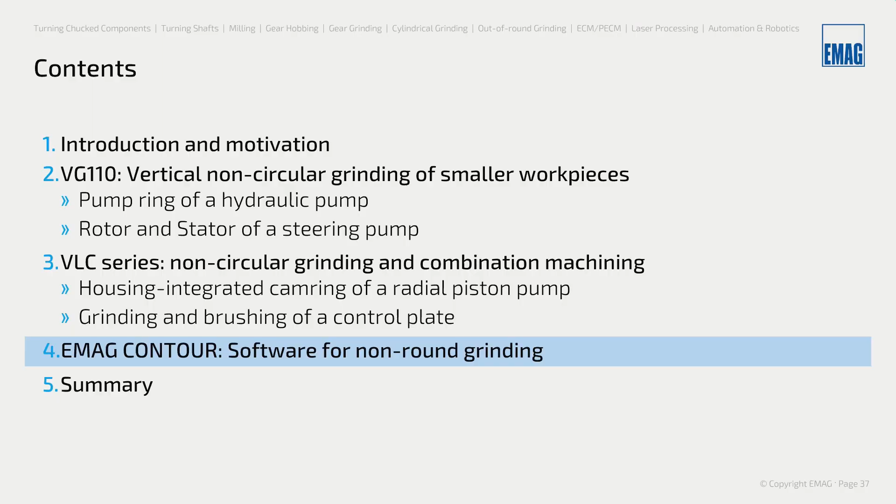Next question, also on the same topic: what measuring tasks can the integrated sensor perform? Is it possible to integrate an external measuring system to make process corrections if necessary? Yes, the integrated measuring probe we use basically to set up a grinding process, to make already the first part in quality. Then we have pre-machining, a measuring step, and then we make the final machining. This ensures that already the first part is in quality. And it's no problem to combine the machine with an external post-process measuring machine or unit—we have done this already many times. Then basically the measuring data come from the post-process measuring machine to the machine, and we use this to get constant quality all over the day.

Okay, no more questions so far.

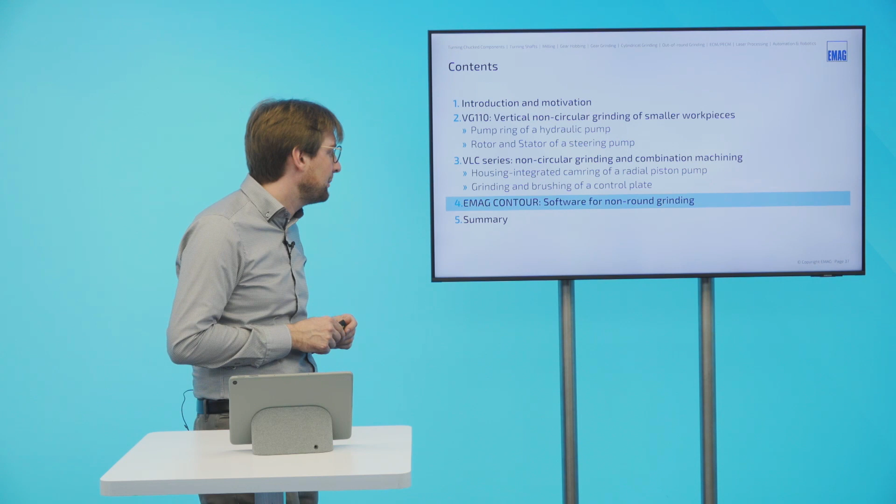So we will proceed with the next chapter, a short chapter about our software tool for non-round grinding called EMAG Contour.

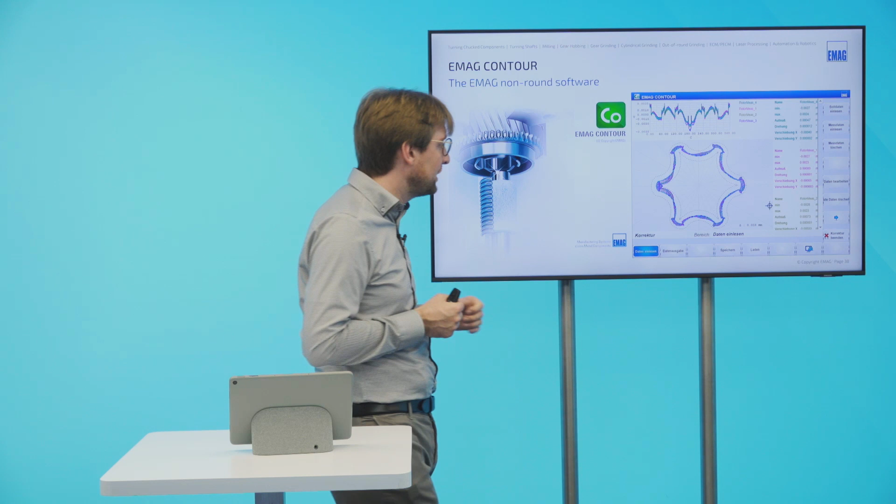As we have to deal with very complex geometries where we need a very good adjustment of two machining axes in correlation to each other—the rotation of the C-axis and the linear feed of our X-axis—it is very important to take into account the dynamic behavior of the machine, to make sure that the geometry of the ground part is in accordance with the required geometry data from the customer.

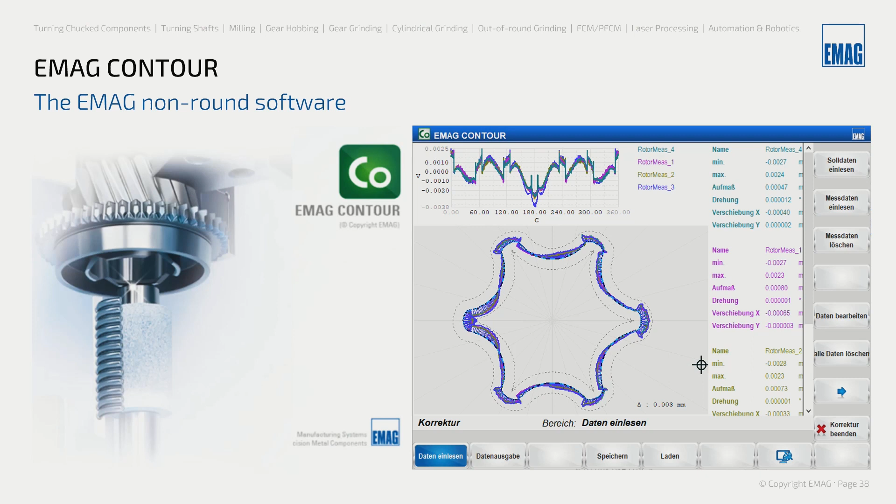EMAG Contour uses the geometry data from the customer as input and calculates, because it knows the dynamic behavior of our different machine types. Based on this data, we calculate the most productive grinding parameters with regard to cycle time, but also make sure that we avoid any upswinging effects because of the movement of the different axes. We have to make sure that there is a very smooth path of the grinding tool to make sure that the geometries are according to the tolerances.

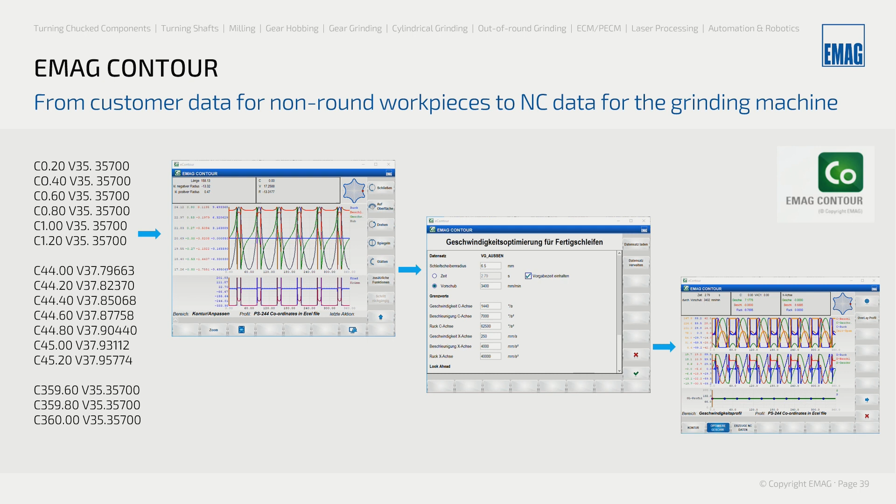We can also use EMAG Contour to calculate correction parameters, because we can implement the data from the measurement in EMAG Contour and make sure that we get the correct NC data with regard to position, way, speed and acceleration from the different machining axes.

So finally, I'd like to summarize the content of our webinar on high precision pump parts. We have seen that the pump market will grow in the next years, because pump components are not only used in the automotive sector. We have a wide range of applications in construction, agriculture, vehicles, but also in consumer parts and so on. So we have many applications and high request of the respective parts.

We have shown that we offer specialized machine solutions depending on the part geometry and depending on the technologies that are necessary to machine the parts.

The VG110 is optimized for smaller parts up to a diameter of 110 millimeters, optimized for internal and external grinding of non-round materials. The VLC series can also be used for parts with bigger dimensions, with bigger diameters and higher workpiece weight. VLC series makes it also possible to integrate other fine machining technologies, hard turning, brushing or honing, so the VLC series is a very flexible machining concept for the processing of chuck parts.

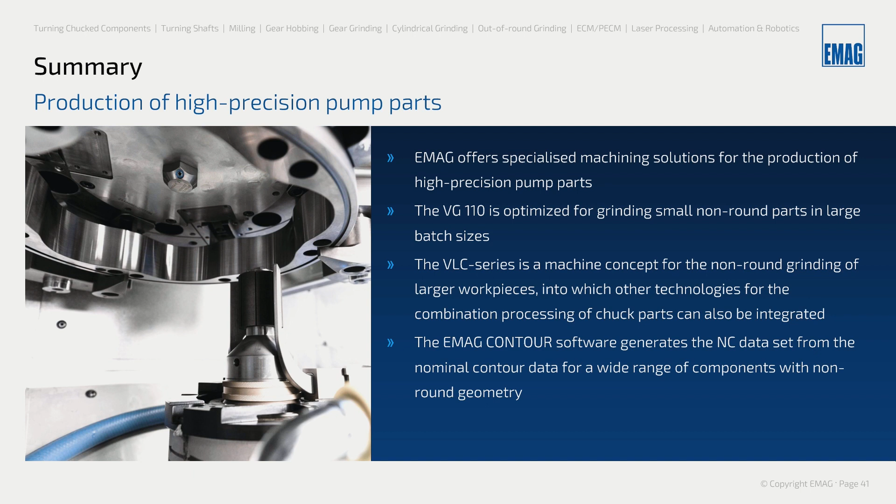EMAG Contour, our software tool, helps us to generate the correct NC data for different geometries, always with the objective to have a short cycle time while fulfilling the quality requirements.